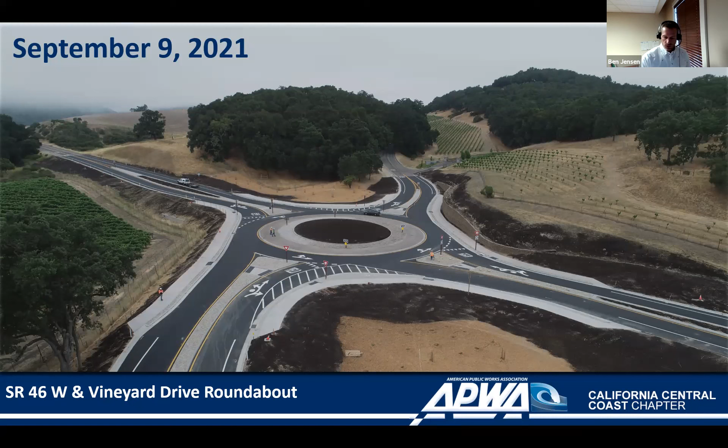So without further ado, we'll go ahead and start presenting on the project. Just by way of quick agenda, we're going to introduce ourselves, do a little bit of the project overview, project history and development. And then I'll talk briefly about some of the design constraints and staging, and then try to preserve plenty of time for Dave to talk about the construction staging and what they actually experienced out there during construction.

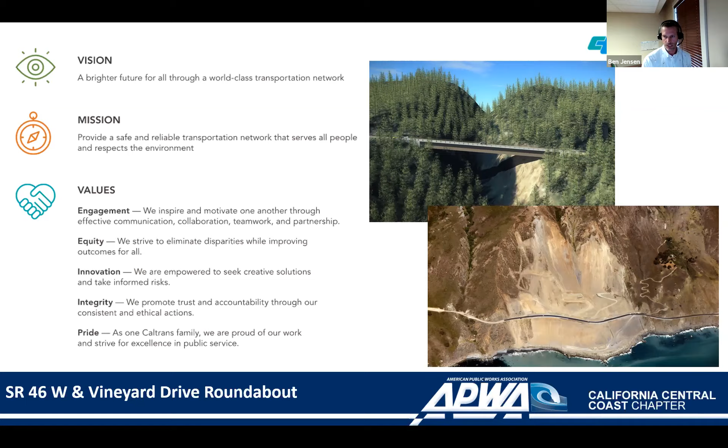The new Caltrans director, Toks, has 5 priorities, and I feel like this Vineyard Drive project is kind of a good representation of those priorities that Caltrans has: safety, modality, innovation, efficiency, and partnerships. We presented and worked with the public by coordinating with TAG in Templeton to make sure their voices were heard. We also coordinated on either end of this project with the county right of way, and the county was a great partner and helped us facilitate the improvements that were going to be impacting their roadways as well.

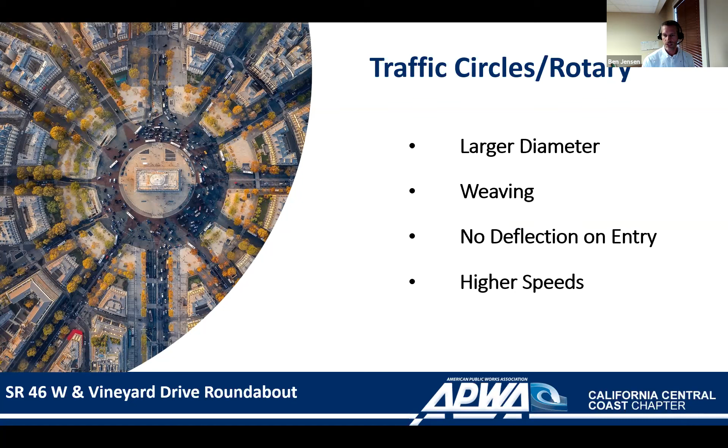I know there are probably quite a few people very familiar with roundabout design, but just to cover a few quick bases, there's sometimes confusion between what is and is not a modern roundabout. In places like DC and Paris, these large traffic circles are often confused as a roundabout, and when you begin talking about them, people panic a little because they don't operate as efficiently or effectively as modern roundabouts. They perform a different function—they're much bigger, there's weaving, no deflection, these kinds of things. Whereas on a modern roundabout, we typically try to get the circle as small as possible to minimize any right-of-way impacts, and it's a performance-based design.

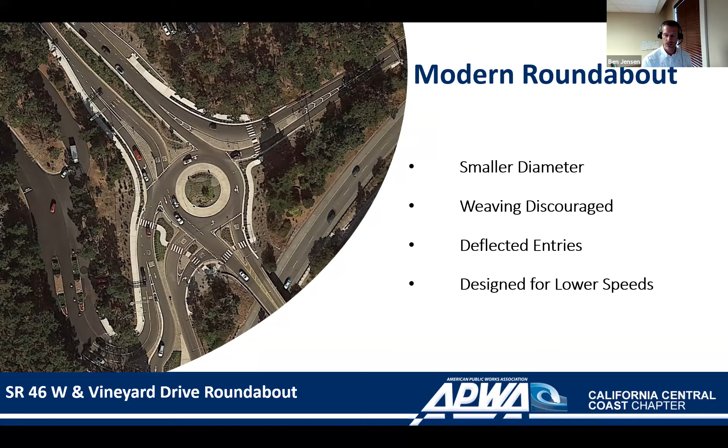Rather than meeting certain standard criteria, we're looking to meet the demands of the design vehicles, the sight distance, and the speeds that people are navigating the roundabout. We want to try to get everybody into as uniform a speed as possible. Caltrans has adopted the NCHRP 672 report, which essentially governs all of those performance metrics. There are other manuals we employ that help shed light, since it's a bit of a nuanced design strategy, but the NCHRP and the Caltrans HDM are the primary tools we use for design.

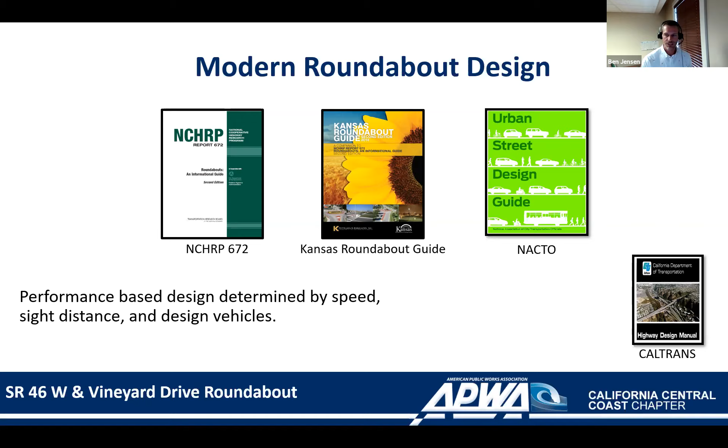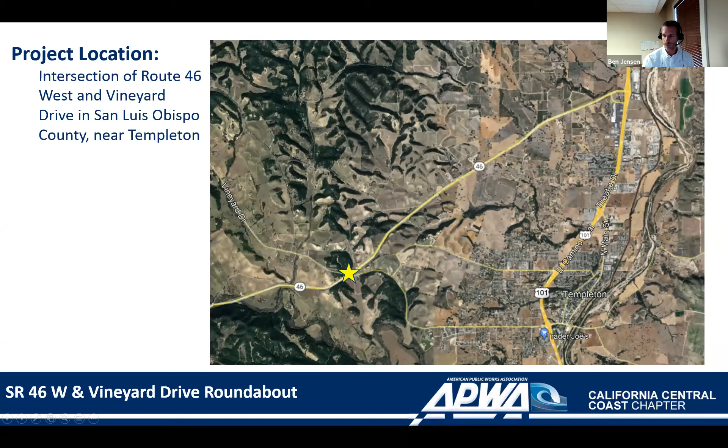Jumping specifically into this project, for those of you who aren't familiar with the location, you can get to this intersection either by taking the Vineyard Drive exit off of 101 in Templeton, or heading all the way up near Paso to 46 West. You can see those meet after passing through a pretty good contingent of wine country before you get there, regardless of the route you take.

So this is the same intersection in 1994. Those of you with a keen eye for transportation design will notice that the intersection has an acute angle, which for transportation engineers is a daunting problem from the get-go, because it prevents people from getting good visibility and sight distance. That's compounded by the hill just to the east of the intersection. There's a large section of hill that's fairly steep and allows people to get some pretty good speed as they're coming through. With this alignment, it has operated as a two-way stop historically.

So in 2003, the same squad and team that I was fortunate to work with worked on a realignment project to try and remove some of that skew from the intersection. It was a moderate improvement, but the overall safety metrics were still operating below expectations. So in 2017-18, flashing beacons were added and an all-way stop. This was a temporary stopgap to try and reduce some of the fatalities and injuries at the intersection. It was effective, but it was not a long-term strategy.

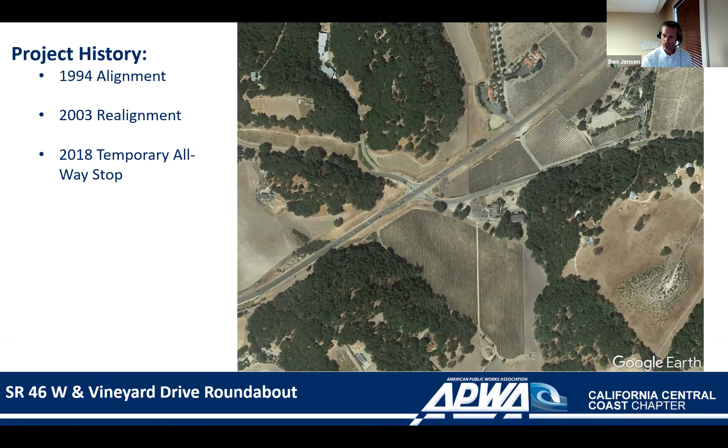That brings us to the current Roundabout project, which is a long-term fix that'll satisfy not only the needs and demands for safety, but will also facilitate the capacity and growth that we will hopefully see for decades to come.

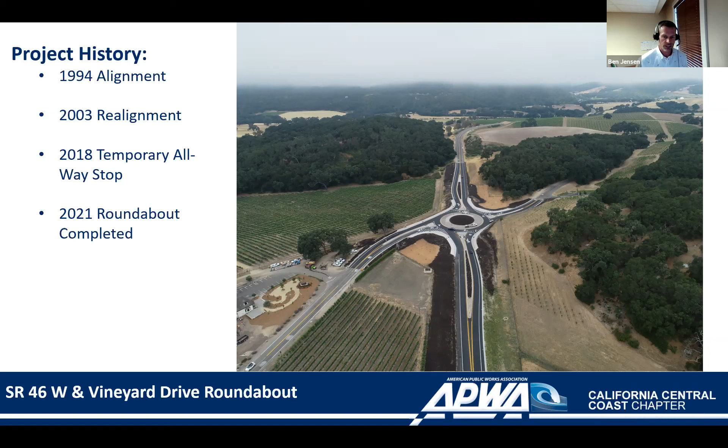So when I joined Caltrans in 2018, this was the first project I picked up, and it was ready for PS&E development, so ready to advance through final design and into bidding. We worked with local hydraulic staff, landscape staff. This is obviously a very high visibility corridor. There's a lot of tourism, and there's a lot of wineries in the vicinity.

So there was a lot of care and thought put into not just the safety requirements of the project, but also the visual characteristics, to make sure the project was not standing out or too much of an eyesore for the local community.

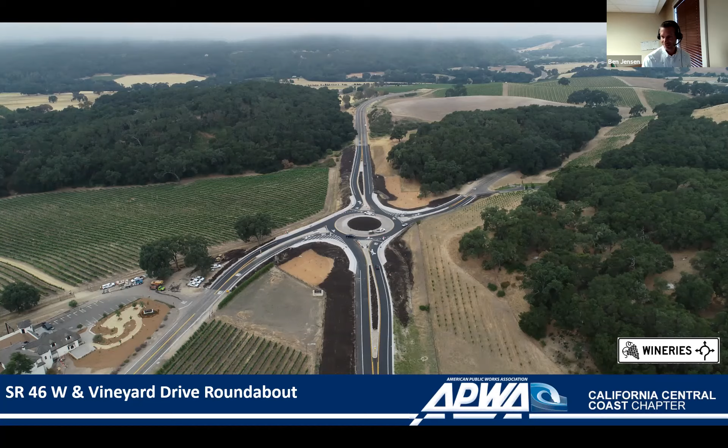This photo I included just because it highlights the soil nail wall, the rock slope protection, or the rock blankets. Everything in the local vicinity was designed with the intent to blend in with the surrounding area. These photos are early, so you can see some of the seeding that's been done in the central island of the roundabout and in the perimeters. But I think when the grass and the seed takes, everything will really blend into the surrounding area nicely.

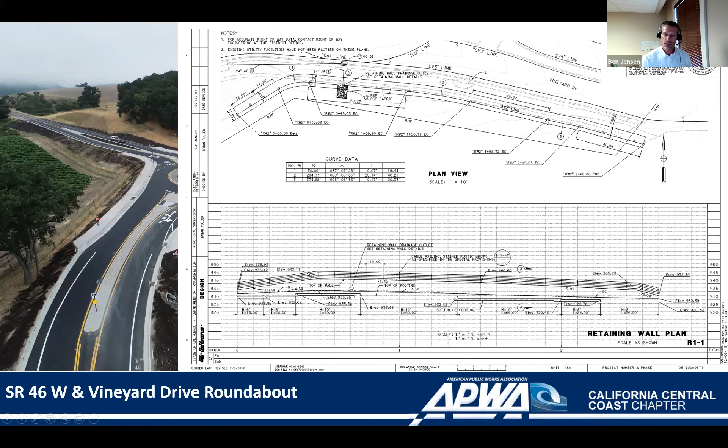So just touching on a few of the design challenges that we faced: when the project was bid by Cal Portland, it originally included a type 1 retaining wall in the southwest quadrant of the intersection. You can see here that the design and layout of the wall was extensive, and it was a big ticket item on the construction contract.

During design, we had extensively potholed the area and knew that there were some utility facilities in the area. We did not realize that an AT&T copper phone line was actually directly located within what we had anticipated would be the type 1 wall footing. Our utility coordination process at Caltrans, working with our utility partners, is extensive and could result in a hefty delay. Fortunately, internally, we had initially anticipated a reinforced stabilized slope design for this same location that did not impact right of way, but it got really close to the fence. So this was a fairly significant issue.

I feel like almost every project in design that I've been a part of that advances to construction, utilities come into play to some degree. Anything we can do on the coordination efforts up front, with potholing and locating the utilities, helps anticipate what those impacts will be. But as is the case here, sometimes there's just not really anything you can do until you start moving the dirt around and see what's actually going on out there.

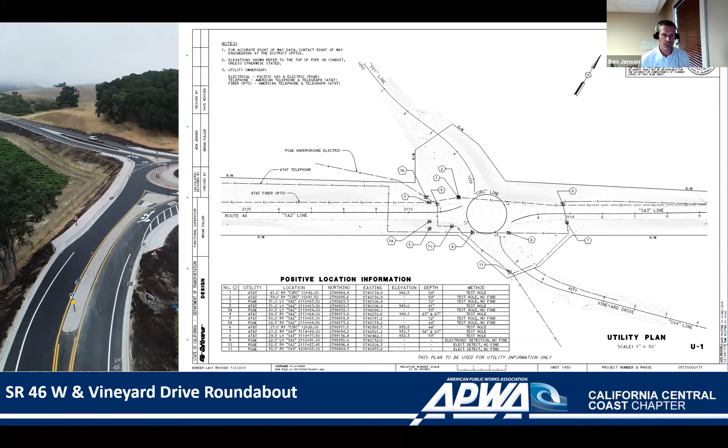Cal Portland was a great partner in implementing and incorporating this significant edit. They were also able to effectively manage the construction staging of the project, which was the most challenging element of the design.

When this project was initially realigned, we were able to close the Vineyard Drive accesses. But early in the project development for the Roundabout project, the commitment was made to the public and to the county that we would not close the Vineyard Drive accesses throughout the duration of construction. So this was a very challenging puzzle to solve, and I spent quite a bit of time trying to take a stab at it in design.

And some of that survived, but I'll go ahead and pass things off here to Dave so he can talk more about that staging and some more of the construction criteria.

Yeah, thank you, Ben. You're right. I think even into the construction, the staging was something that was tricky, and subsequently a lot of fun for us to try to figure out. And I think we had some success with it. So I'm excited to share with you all today what the staging originally looked like, how we were able to do some restaging and some work out of stage that ultimately led to less public impact in the future.

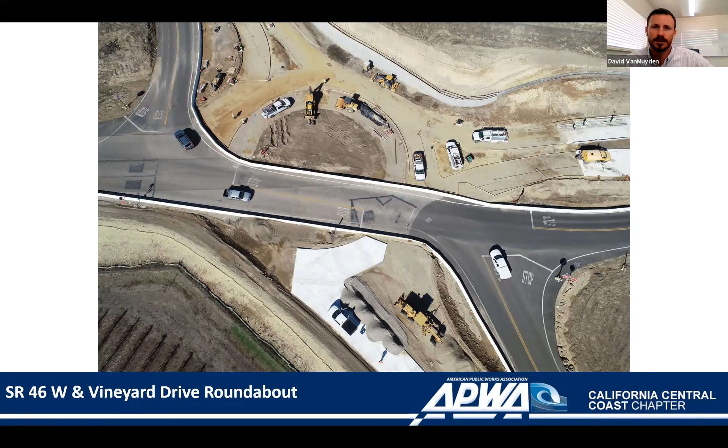On the next slide, Ben, I have some notes on what the original 5 stages look like. The first stage was split into 2 phases. We originally needed to create a temporary detour for Highway 46 westbound and eastbound traffic. That was done to the southern edge of Highway 46. It required a significant fill embankment and allowed traffic to come off of the main Highway 46 corridor, mainly to the east of the intersection.

Once we did that, the second phase of stage 1 was the main portion, the bulk of the work. It was the stage that we were in the longest, and primarily was the soil nail wall in the northeastern quadrant, all of the pavement section for Highway 46 and Vineyard in that northeastern quadrant. And then there's a couple of things that I'll mention a little bit later that we were able to do in this stage that helped us down the road.

Stage 2 involved a traffic switch, a movement of K-rail, and then constructing the pavement section for Highway 46 and Vineyard in the southwest and southeast quadrants. So we were straddling Vineyard on the south side of the circle. And then we moved into a rather small stage 3, which was up in the northwest quadrant.

Stage 4 was the main circle section. At this point, the plan was to have all traffic still stopping at the intersection, but taking that same circular path around the future roundabout. So we had closed the entire center to construct the pavement section.

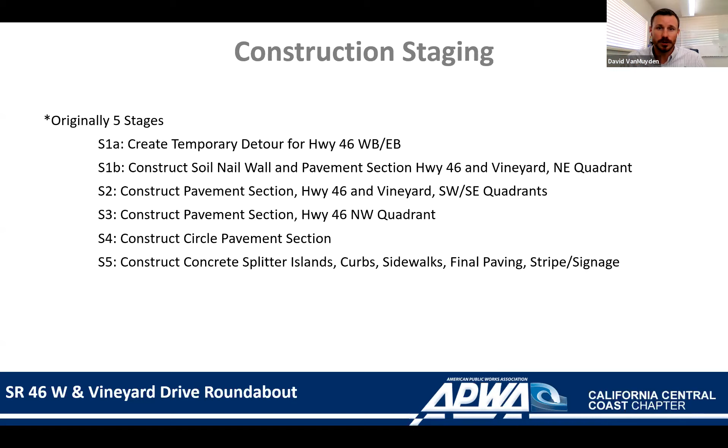And then stage 5 was originally when all of the concrete splitter islands, the curbs, sidewalks, final paving and stripe and signage was to be performed. And that would have been really a large stage originally, and significant traffic control as well.

So here on this next image, I have a hatched zone to show the main stages at the intersection. So stage 1, phase 2, once that temporary detour went in, it's all up in that northeastern quadrant, like we mentioned. The bulk of stage 2 again in the southern half, and stage 3 in the upper left-hand corner there. What was important about our coordination is we have a lot of subcontractors who need to do work in stages as well.

And so this particular picture is something that we created and handed to our subcontractors. This specific one is the drainage plan, and we needed to inform our subcontractors what the plan was for drainage, which elements we expected them to install in that stage, and which ones would be performed at a later date. As you know, once you have a stage available, you had better do everything there is to do in that stage, because afterwards you move traffic on there and you won't have access.

And so, of course, we would hate to have a pipe missed, and have to undermine the existing roadway to try to tie on to a section of pipe that wasn't extended out far enough in that phase. So it's a lot of communication on our part with all the subcontractors to make sure they were aware of where the staging was going to be. They came prepared with the materials to do the quantities we expected.

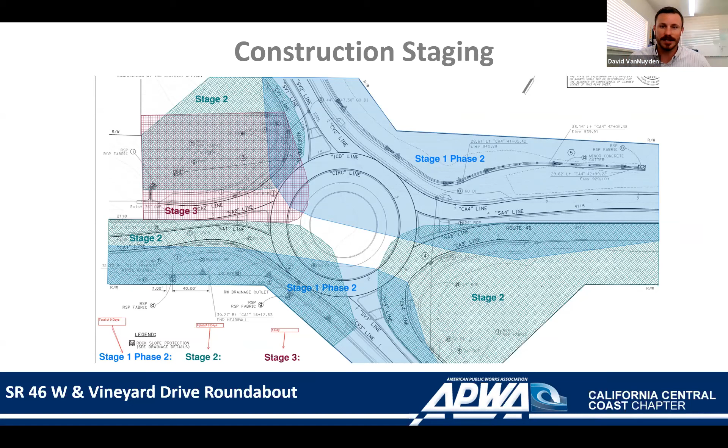And then on top of that, making sure that they take good references, whether with GPS or some other surveying method, to establish where they left off. Once everything is buried in that stage, all the marks are gone, and they need to essentially find where they left off and tie back into that, at that interface between two stages.

You've already seen a couple of our drone photos—overlay those two images and get out and look ahead of the stage to see where traffic is going to be in this next stage. If we put some of this concrete in, is it going to impact traffic? And if not, let's do it now, because that saves traffic controlled days and public convenience down the road. That's what we're able to do.

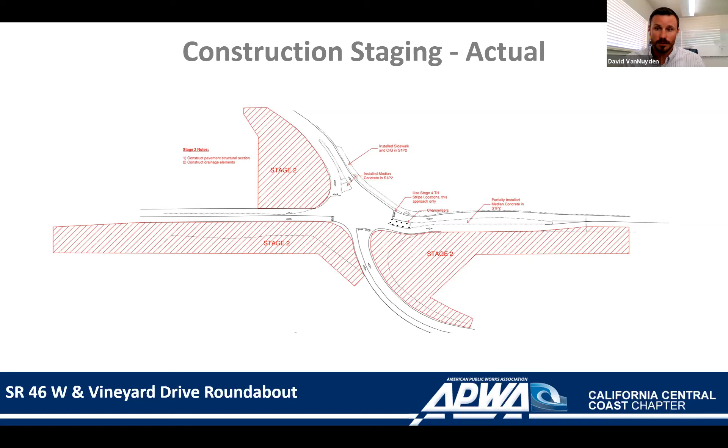If you click one more time, Ben, there's another image of some of the things we were doing. Our project engineer, Michael Borelli, put together this drawing, which takes our drone photos of the construction progress and overlays the next stage traffic handling plans to give good information to the owner, in this case Caltrans, to say, hey, this is what it's going to look like in the next stage—are you okay with this, can we proceed? I think that information ultimately led us to be able to do some of this.

I think without providing these drawings, without spending the time to think about these things, we'd have ultimately had a longer duration project, potentially more traffic control at the end, which would have been flagging and pilot car, compared to doing a lot of this work behind K-rail without having to inconvenience traffic.

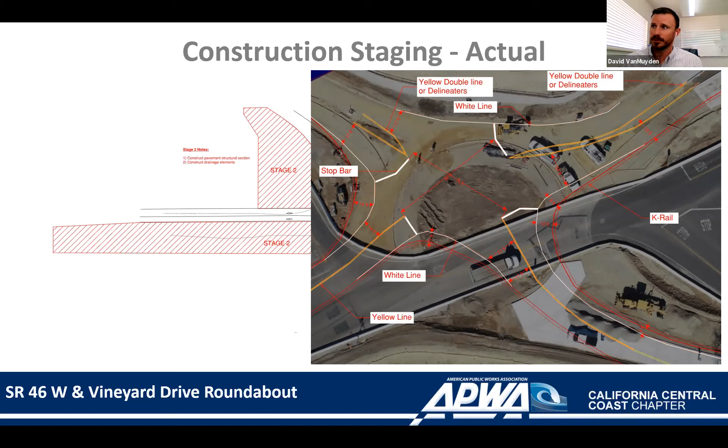So I have a couple lessons learned on staging that I wanted to share. It's really important to coordinate early with the surveyor to ensure proper alignments. This project had a lot of alignments, and they were dictated by stage, which can be helpful when you're trying to keep track of which part you're going to actually survey. But it can also create challenges if the alignments between different stages don't line up. We had a couple survey challenges, nothing too significant, but it's something to take into consideration—making sure alignments across stages and phases match up, so you don't have surveying in stage 1 that puts K-rail here and surveying in stage 2 that puts it in a different spot.

One of the things we've shown already is modeling and overlaying traffic handling sheets with the stage construction sheets, in combination with Google Earth, and even better with drone photos. It really allows us to have one foot in the construction of the stage we're in, but also one foot in the next stage—to make sure we don't miss anything, that we construct everything available to us, and also to see what we can do out of stage, what opportunities we have to speed up construction, to do things concurrently behind K-rail versus later down the road under traffic control.

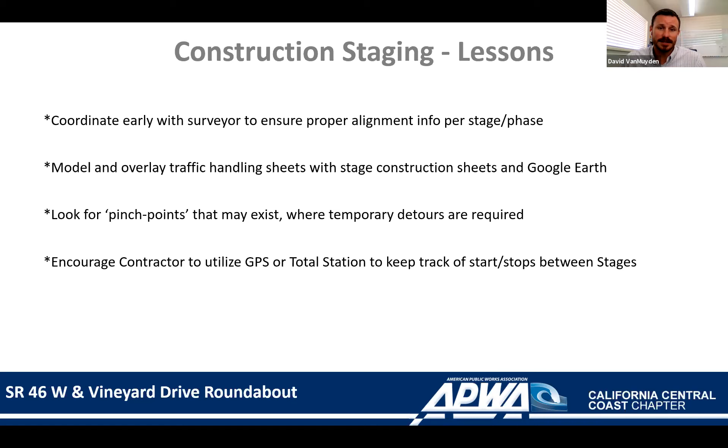Our crews are looking at paper plans in 2 dimensions, but if we can show them with a GPS model or drone photos what the next stage is going to look like, it really helps them be more productive. They spend less time thinking about what it's going to look like and where things go. We give them that information and they can run with it. So that was very helpful, and I would say almost a requirement.

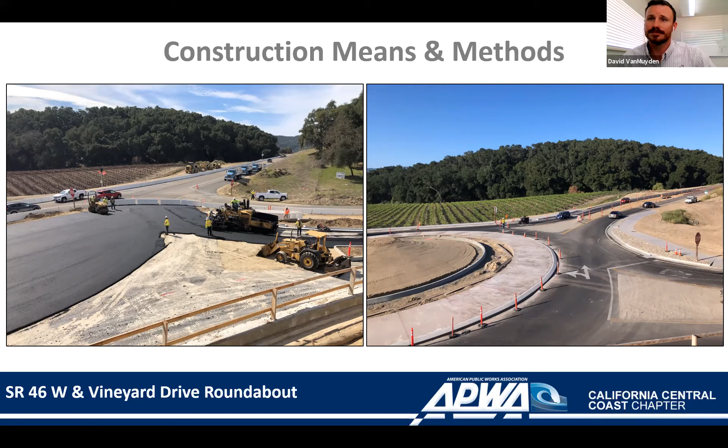On the next slide is a picture from stage 2. So now traffic is running essentially on the final alignment on Vineyard Drive, the final alignment on Highway 46 to the east, while we reconstruct the southern half.

I thought what was challenging about this particular stage, and it's difficult to see from the air, but right where the two stop markings are on Vineyard, right there, yep Ben, that was where 46 sort of dove off at an angle on our temporary detour route.

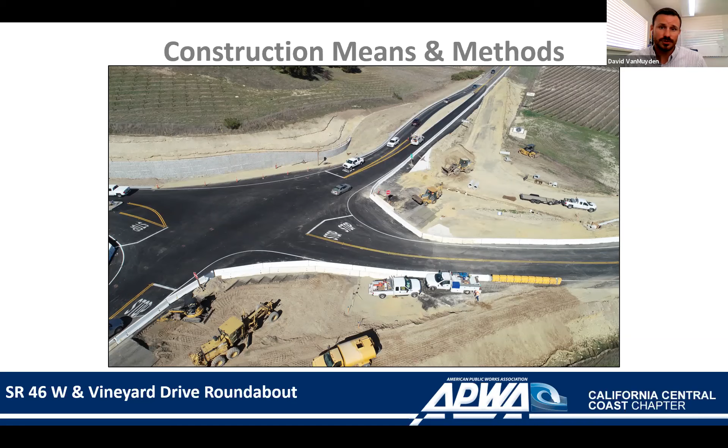What was challenging about that is, again, on a 2D set of plans, all you have to worry about are the horizontal alignments and where things are going to cross. But out in the field, we were dealing also with vertical changes between the design and the existing. It just happened that the new design at that location was several feet higher than the existing roadway. So when we went to do the traffic switch, we ended up having a 2 to 3 foot section of base right there just to build up to pave and have that smooth transition. So just another opportunity, during the design phase, to see not only how the horizontal alignments are between stages, but also whether there are vertical and elevation changes between existing and design during stage crossovers. So that was a fun challenge there.

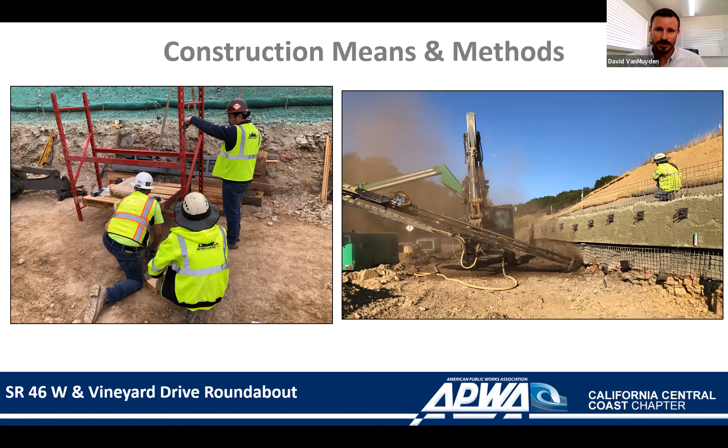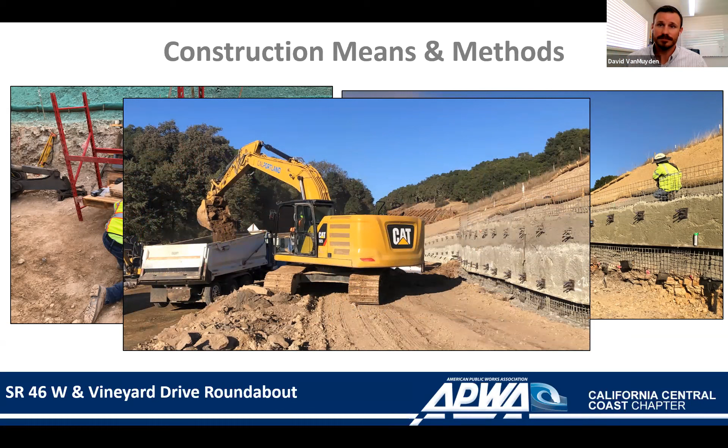All of this occurs one level at a time. We start at the highest row of nails. We create a level bench for them to put their equipment. They drill all that row, then shotcrete. We come in and excavate down to the next row of nails. They come in again and install the second row of nails. I have one more picture on this slide that shows the interim phase after they get done with one row. We come and lower that bench so they have access for the next run. Once we have access and all the nails are in, everything's shotcrete. Then we install rebar and forms for the facing.

This also created some engineering challenges, because with a typical retaining wall, a type 1 retaining wall, you can form on both sides and use some sort of tie system between the two forms to withhold the force of the concrete, and that would be a traditional forming system.

On this, we only have access from one side, so this is a single side forming system. What we ended up doing is some engineering to have kind of a combined system to withhold the force of the concrete.

It may be hard to see, but about every 4 feet up and down there's some coil rod that we installed into the shotcrete and grouted, using nuts and washers to hold on to the forms. We also have push-pull braces going down to K-rail that we backfilled with base.

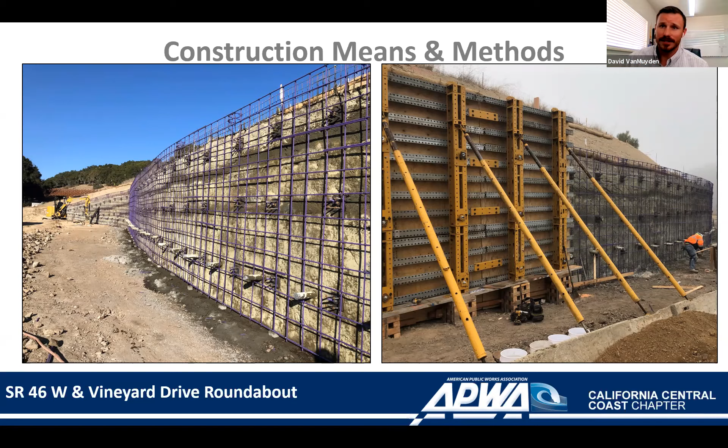That's the system that withstood the force of the concrete until it hardened. On the next slide, we show the finished look before the stain. We had a company come in, Custom Rock, and do the staining, a very intricate process. It took about a week to do this - just one person doing all of this by hand for that duration. I think what a great job that person did on that wall to make it look so natural.

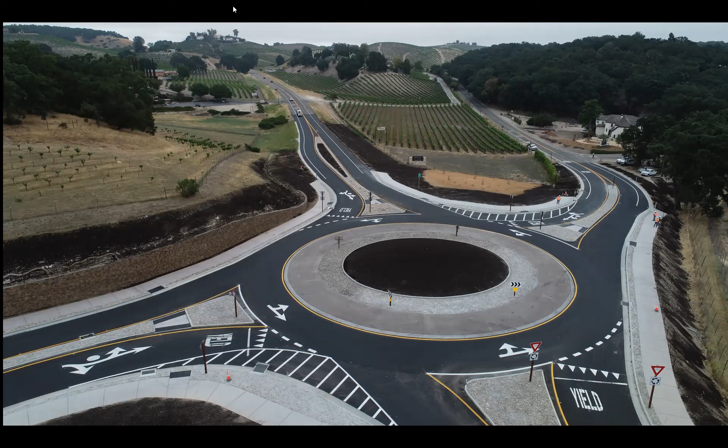Thank you, Aaron. I really appreciate that. And genuinely, this project, Aaron, the other people that I had the privilege to work with at Caltrans, it's definitely one of the brightest spots in my career. So I appreciate that. And hopefully if everything goes right, we'll have a presentation on the turbo at some point as well. I'm excited about that one. And I'm happy to hear that Aaron's the PM on that.

That's great. There is a question about the landscaping, it was in the chat, the type of landscaping that was in the center or what's planned. Is there any plans for it? Oh, thank you, I missed that.

Yeah, these photos were provided by Cal Portland, and these were taken shortly after the seeding was applied. So our landscape staff designed or designated local wild seed that's drought tolerant and low maintenance. So while this Central Island looks black now, what actually will be there, hopefully not too long, will be some grass like you see adjacent to this area.

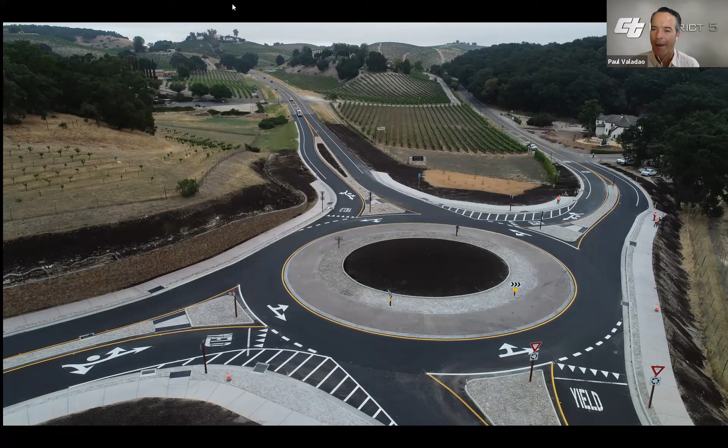I'm going to go ahead and plug the session that Dave will provide, a module or presentation on a turbo roundabout. We got people Googling turbo roundabout as we speak. So it is an absolutely new concept in California, but unfortunately Florida beat us to the punch. It's very prevalent in the Netherlands. But Dave, just promoting your next APWA or ASCE presentation.

Yeah, thank you, Paul. It was actually while I was at Caltrans, Paul invited me to a TRB webinar on turbo roundabouts, and I was stuck on another intersection with much, much higher truck and vehicular volumes with an acute angle, and it was really challenging. So a turbo roundabout essentially is a multi-lane roundabout design.

So it's a roundabout with multiple lanes, but you isolate each individual lane with a mounded curb. So really the characteristics of a turbo roundabout are there's no deflection on the entry. Each individual lane is segregated to discourage weaving, and then it's spiraled as well. So if you start on the inside lane, you will have to take a left turn. You can't stay in there for a full U-turn.